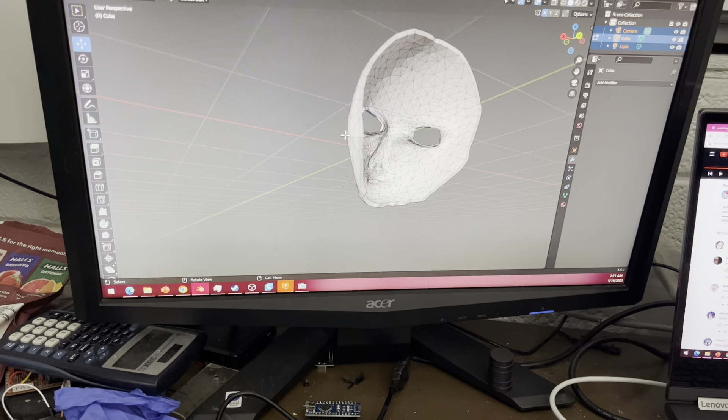Alright, so what you see right now is some stuff I've been working on. First of all, I've learned how to use Blender. You could see this is Blender, and what Blender basically allows me to do is make organic type shapes. So this is a mask which I'm going to be using for the face of the robot. If you saw in some of my posts, I was using a foam head for the face of the robot.

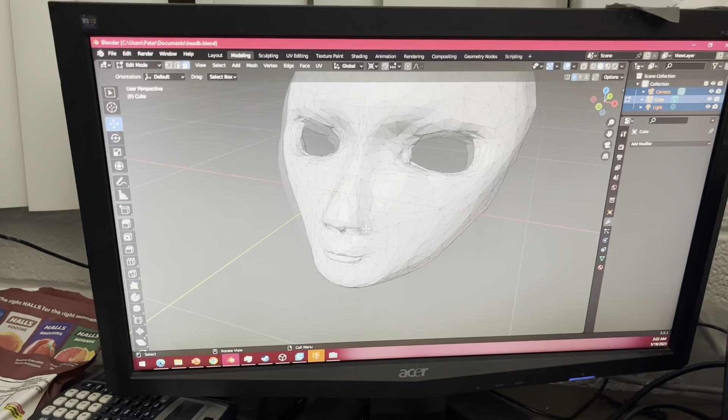For the last robot that I made a few years ago, that one didn't even have a face. But yeah, so this is the face that I modeled in Blender, just really kind of quickly. I think the proportions are kind of okay. Once again, I barely learned how to use software like this, this week.

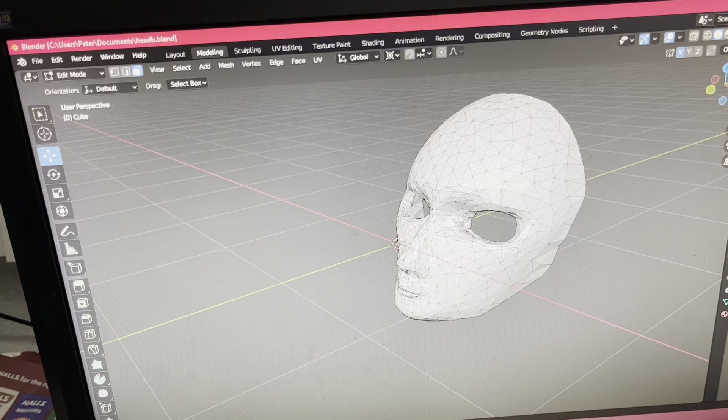So yeah, basically what I did is I modeled a head in Blender, and then I kind of cut the polygons off of that head, and that left me with a surface, which was this face. And then from that surface, I extruded all of these polygons down into a scaled down version of it here. So what that did is that created an object. And with that object, I was able to 3D print it.

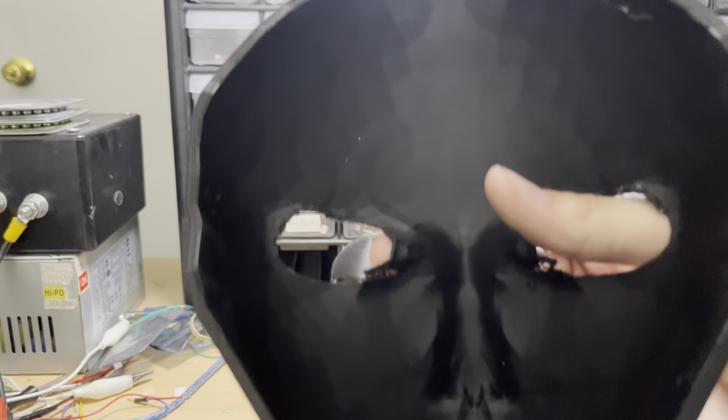So you could see we have like a mask right here, and obviously there's nothing inside the mask. So for the final version of the robot, I'm going to want to have cameras for the eyes, as well as other stuff, maybe in the nose or mouth, to make it move and such. And this is just a test piece. It doesn't have any of the hardware to do that, but yeah, I will be able to put that in later.

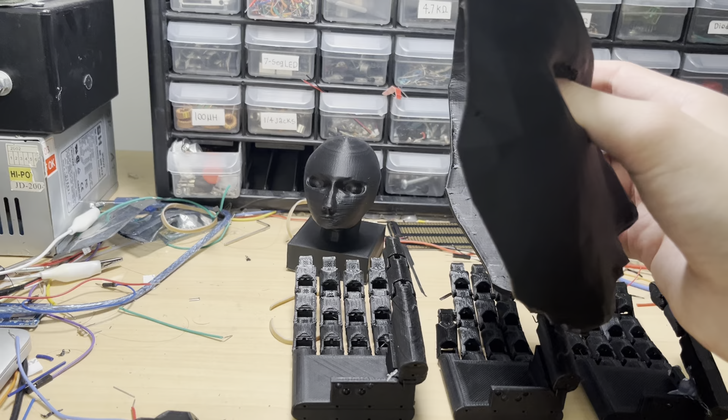Basically, the normal process by which I make these 3D models is I do it in Fusion 360. So what I'm planning to do is model the interior hardware in Fusion 360 and then import the STL file of that into Blender, and then combine that mesh with this one into an object that I could print, which will have this organic shape of a face and be able to mount to servos and such.

This is very good, as this is a problem I've been working on for a very long time and has been very frustrating. How do I make a face shape? In Fusion 360, that's not a trivial thing to do, and Blender is a hard software to learn how to use, but yeah, after just a little bit of working on it, I think it's pretty good.

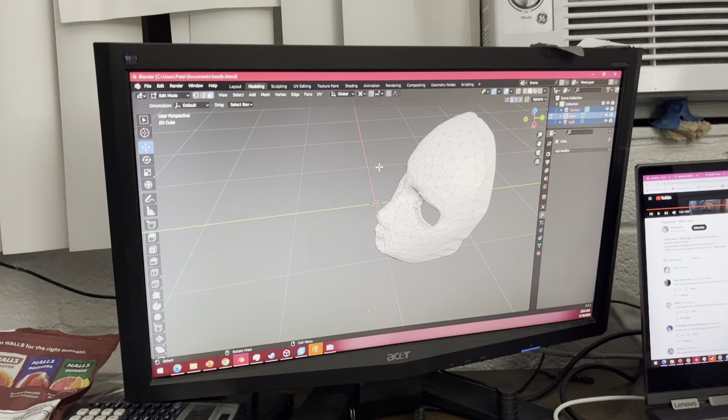I didn't need to do a proper video about that, but yeah, I sculpted it in Blender, which was not as hard as I suspected it might have been.

Also, as I mentioned, in order to make this, I first made a head shape, which is what this is. This version is slightly refined from this original version, as you can see. This is just to get the head shape and 3D print it.

I basically just sculpted a head and a neck out of a sphere, and then I put a big rectangle on the bottom of it so it could print flat like that. And yeah, as I said, I basically got this mesh, and then I sliced it just by deleting faces that are back here. And then I had the surface, extruded it down, and I extruded it into a smaller version of itself farther back. So once again, that gave me an object, which is this.

So it is approximately 5 millimeters thick. So that's good, that I could control the thickness of that.

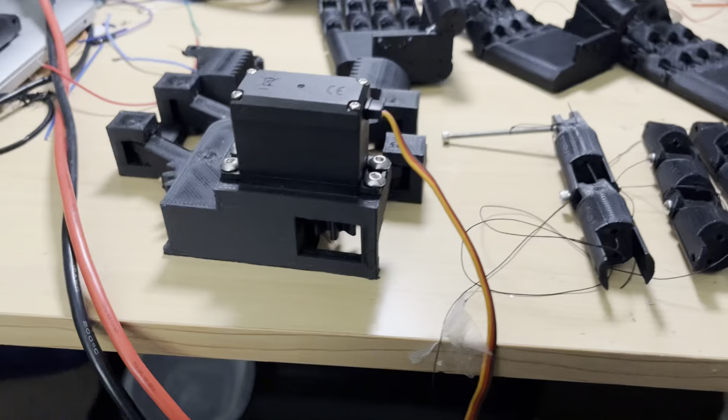All right, moving on. If we actually want to make a robot, there's going to be actuators, and to do that, there's going to have to be hands and stuff.

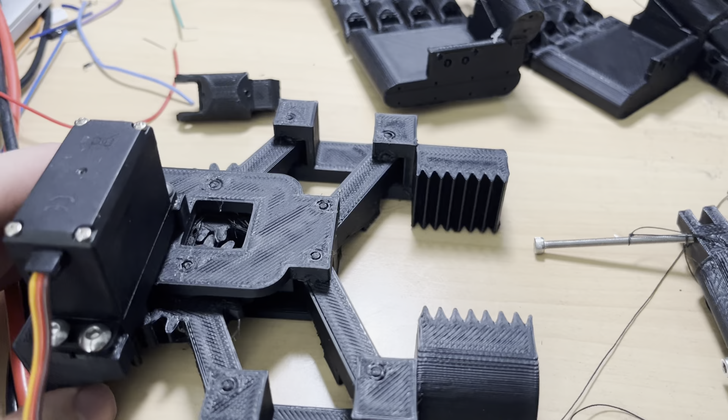So here's something I made a while ago. This is actually a gripper, and what's notable about it is that it was printed as a single piece of plastic, pretty much. There are only two 3D prints here. One of them is all of the gripper, and the other thing that I had to print separately was this little spur gear right here.

So yeah, you can see if I move the servo, it can grip things. And it does have a full range of movement. You can see that I grabbed that bolt kind of accidentally right there. As I said, I would power this up, but I just want to make a video really quick about it, so we're not going to do that. But you do see how this can work.

Very briefly, this was printed as one piece by doing several tricks. First of all, I had these kind of built-in supports right here. So yeah, this whole thing printed without support, which is kind of hard to model, but I was able to get it to work pretty much.

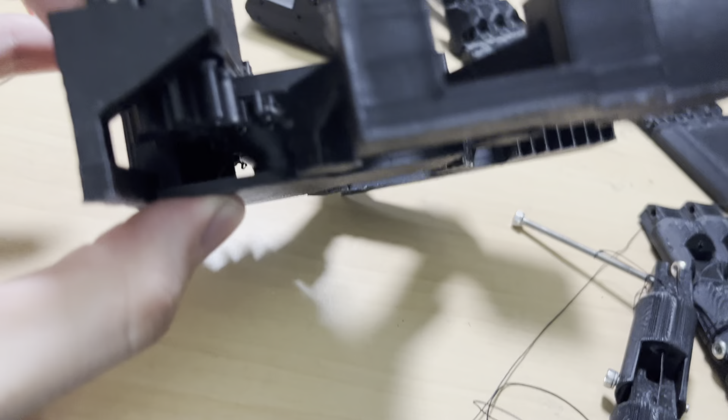So yeah, these are just kind of here, and then these gears have a conical base to them, so that allows it to print without support. And then the little teeth of the gear, you could add kind of conical support to that too, but I just kind of let it print loose, and then it is kind of messed up on the teeth individually.

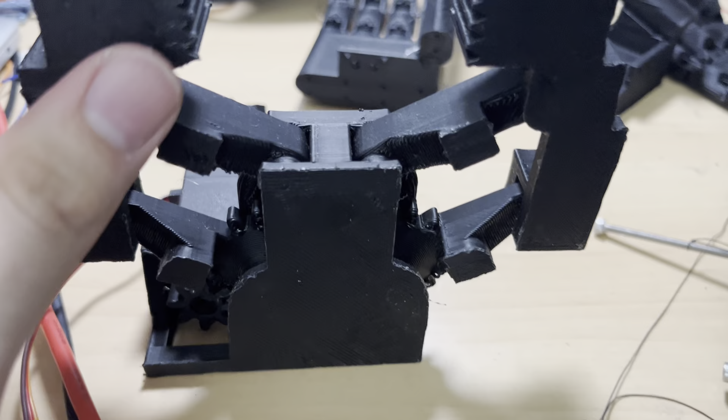But it is mostly okay, and it works fine for that. So I was satisfied with that, and all of these bearings are just kind of conical shapes, going in and out. Once again, making stuff like this kind of deserves a proper video as well.

But yeah, moving on. So this is kind of a gripper shape, but it's not very humanoid, and I want to make a humanoid robot. So to do that, humans usually have hands, so maybe it would be good to have one as well.

So hands usually contain fingers most of the time. So we need a finger mechanism, and here's kind of a quick one that I made. Yeah, so this just kind of uses a string, and yeah, it kind of bends like that.

So as the string pulls in, the hand will bend. If I could get a hold of it, you know, it will bend like that. And this is a very basic fingering mechanism that I just modeled out yesterday.

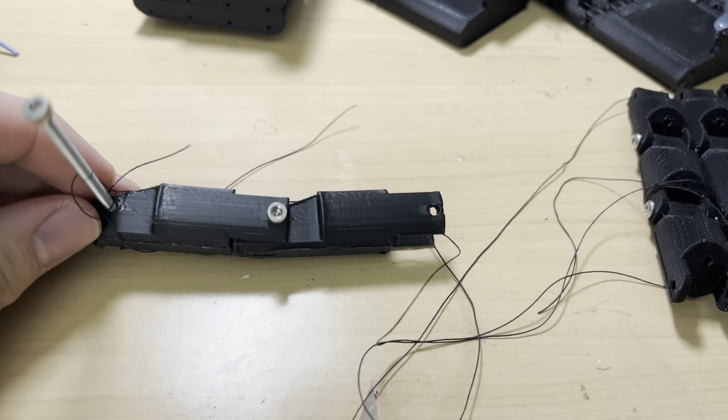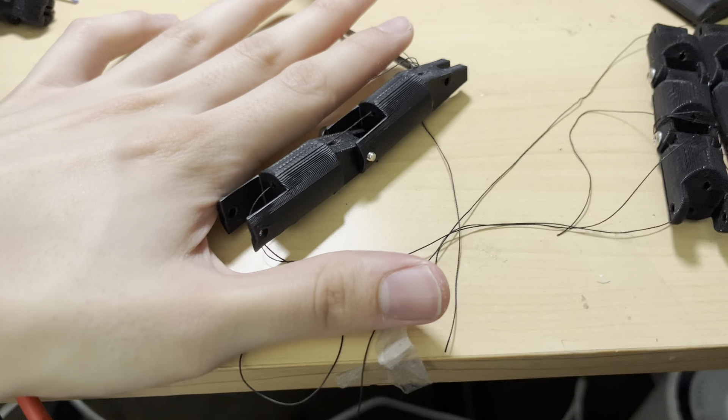And obviously that mechanism does work, but this mock-up of it had a lot of issues. First of all, it's way too big. I want to make like a Hatsune Miku robot, and that would not be you know, 7 feet tall or whatever.

So yeah, this is too big, and it's also not really that good. You can see it kind of gets stuck here, and it's stuck. It gets stuck in this position because it bumps against when it goes all the way down like that. And yeah, this shape was not very good.

So then I moved on to what was going to be the final shape, which is this one. Obviously I don't have this hooked up to the string, but you can see that it curls up nicely like a finger does, like that, at about the same angles approximately.

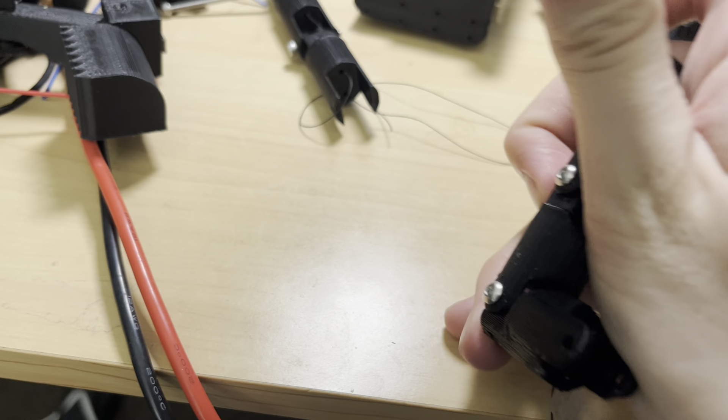And this shape, I was satisfied with pretty much, but one thing that I didn't like was these bolts. As I mentioned, I was experimenting with printing moving parts in one place, as this does. So I tried to do that with this, and this uses no bolts, which saves me the time of assembly, and also I don't have to look for these bolts. And when I printed that, it works about the same.

Save those 2 screws. So now I decided, well, if I could print that in one place, why don't I just print an entire hand in one place, which is what brings us to these. So first off, I thought that I needed to print the hand and the thumb separately, so that's what this was, and I just glued it in place afterwards.

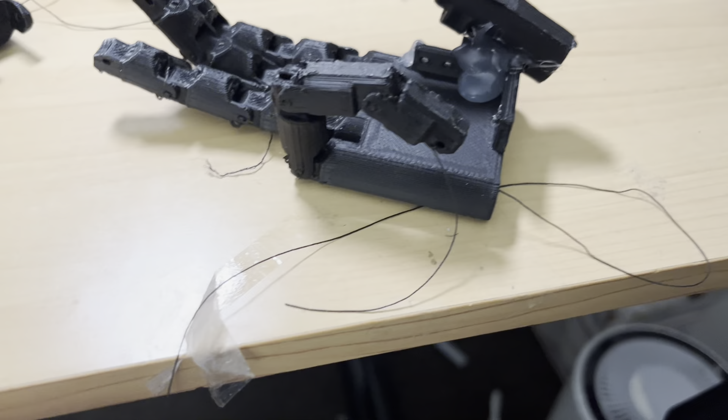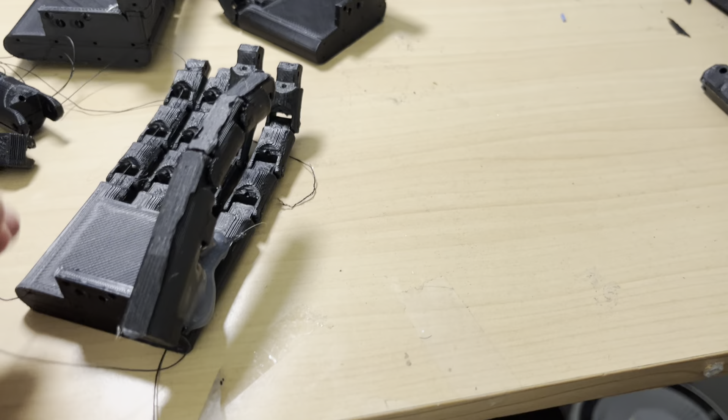This one is hooked up, so you can see that if I pull the string down, it bends like this, which is not really that good. I kind of wanted it to bend more like this, but the way it works here is pretty much fine. It's hard to do this while holding the camera, but it does give me a fairly good motion. It also has the string could go here at the bottom hole to pull it back.

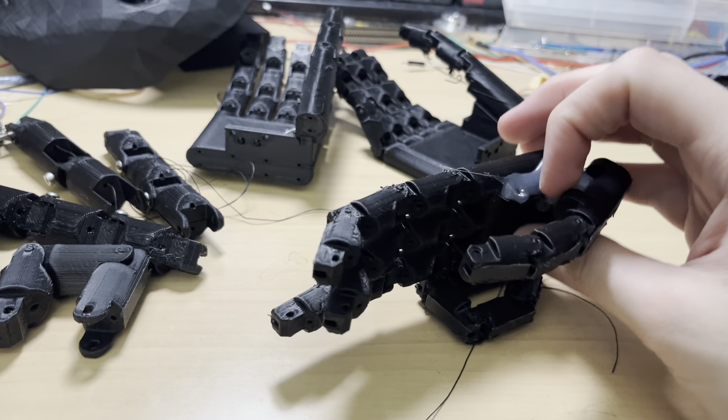So there's this, and I think this was pretty good. These fingers are the same as these, but it's printed at 70% scale, mostly just to save time. I think this would be a decent size hand for the robot size I'm going for.

So then I tried, okay, why don't I just print the entire thing in one piece, which is what this was. This one didn't turn out so well, mostly because these joints sometimes break. So the print-in-place joints that I had were pretty good for this full scale version.

But for a 70% scale, these little nubs you can see right here, they're smaller, and that basically means they just break off sometimes. So yeah, that was a problem with this one. But otherwise, I think this is kind of what I'm going for in a hand shape.

One thing about the human hand is it has two positions of the thumb. You could do this kind of thing where the fingers are in the opposable state, which is what this is, specifically opposing the index finger. But the thumb can move, so we could oppose any of these fingers. Additionally, the second mode is to have the thumb completely outstretched, opposing none of the fingers, and then you could make a fist.

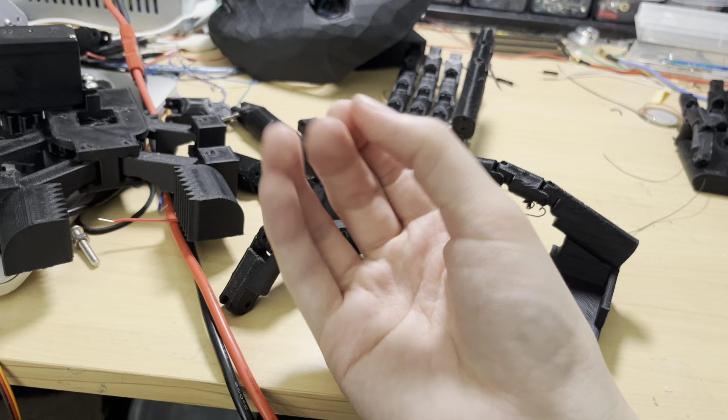But for this, that would require having a motor on it, which I might do later, but just to make a basic hand shape for grabbing stuff, this kind of claw opposing the index finger would make a fist like this, but it's fine. So that's what this is. For a first version, I think that's okay.

And then this is the version I'm working with right now, printed at 75% scale. It turned out nicer, it has all the fingers, though I do think some of these joints might break. Like if you look at the thumb, you could see the nub is supposed to stay with the grain of this part, not with this one, but it does look like it is moving, though it's still solid, so I'm not sure.

I'll just test it, and if I have to improve this, I could print it at a bigger scale, make these bigger on the same scale, or go with the conical bearings that seem to work for this, which I might do, but that would require modeling a lot of this over again. But this does seem like a worthy candidate to try to make work.

Like actually stringing all of it up and making an arm piece which would contain all the servo motors. I'm thinking about going with just one servo per finger, and that should be good for what I'm doing. The servos I'm going to use are these MG996R, which are quite powerful. One servo would handle both the in and out motion, just by having a pulley that would extend the fingers in and out.

So yeah, I think this is going to be the hand for my robot. I'm going to probably print another one of these, might change the scale again, I'm not sure, but this scale I think is pretty okay. This hand I think is decent, though I do want to improve a lot of stuff to make it more durable. I also want to make the thumb move, and later I want to do the flexion, which would require more strings and more motors. So yeah, that's for later.

But for right now, I think just for my robot progress update for May of 2023, I have a good head shape to start with, and a decent starting point for a hand, and also I have a claw if I want to use that as well.